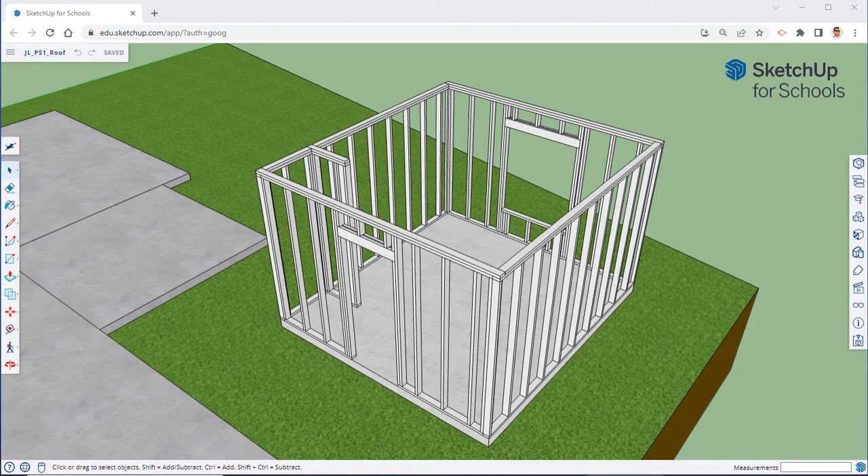Welcome back to our next episode of our Framing Plan Set 1 project. Here in this episode, we're going to finish up our closet. We already finished up one side of it. We just need to finish up the front.

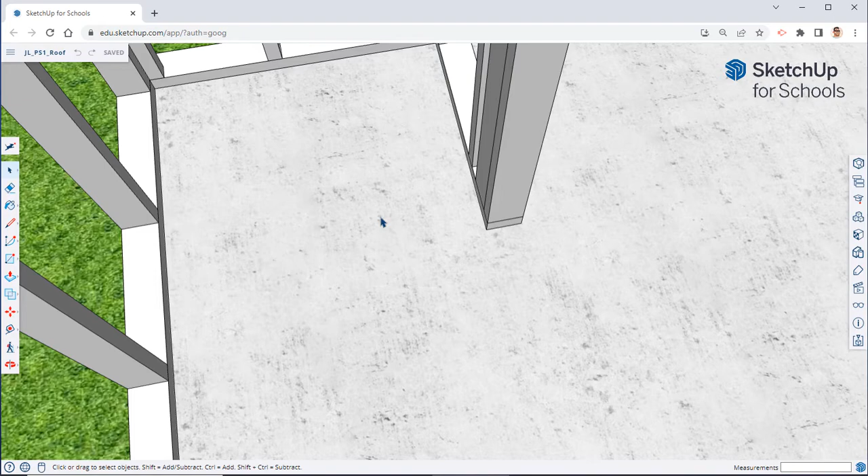In the blueprint book, it's really framed up weird up here in the front. I'm going to kind of ignore that part and just frame it up regularly. So let's go ahead and mark off where our base plate goes. So it's a 2x4, so it's 3.5 inches wide.

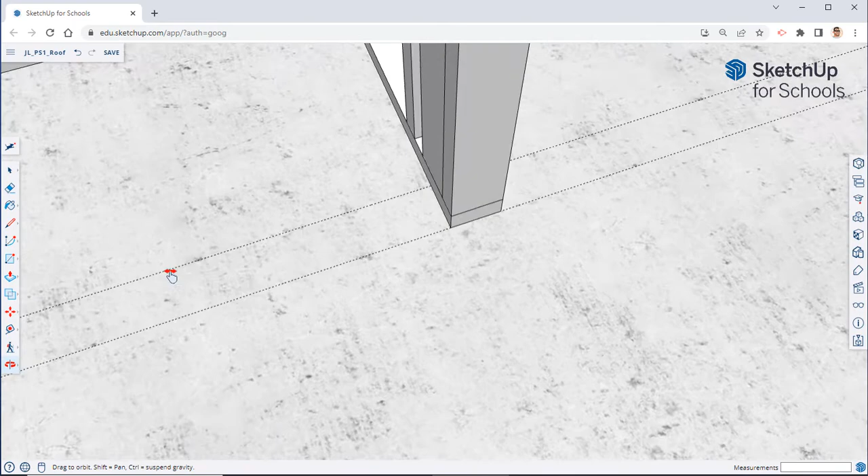And I'm simply going to make a rectangle right there. Select your push-pull tool and push-pull it, hover over one of those other places, or type in 1.5. Whichever way you want. Hit your spacebar to bring up your selection tool, and now you can quickly turn this into a component.

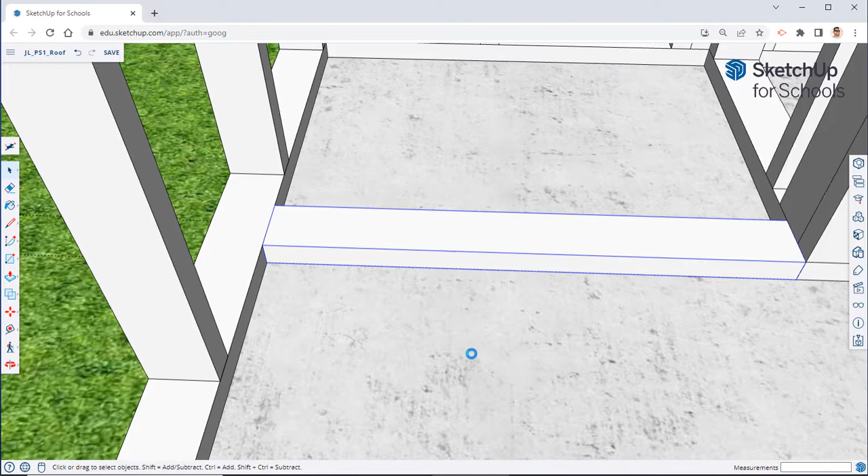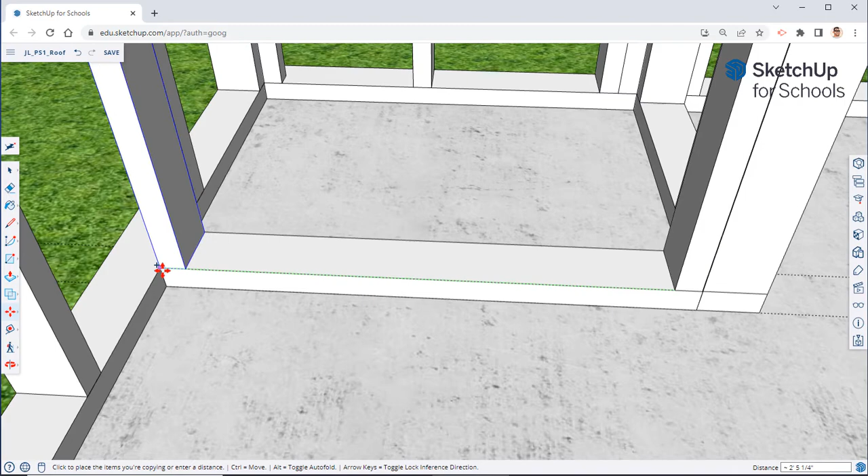Let's go ahead and use one of our regular studs. So I'm going to take this one, hit Control, bring it over here. I want to place it there in that corner. I'm going to take this corner and bring it over to there, and then select this corner and bring it there.

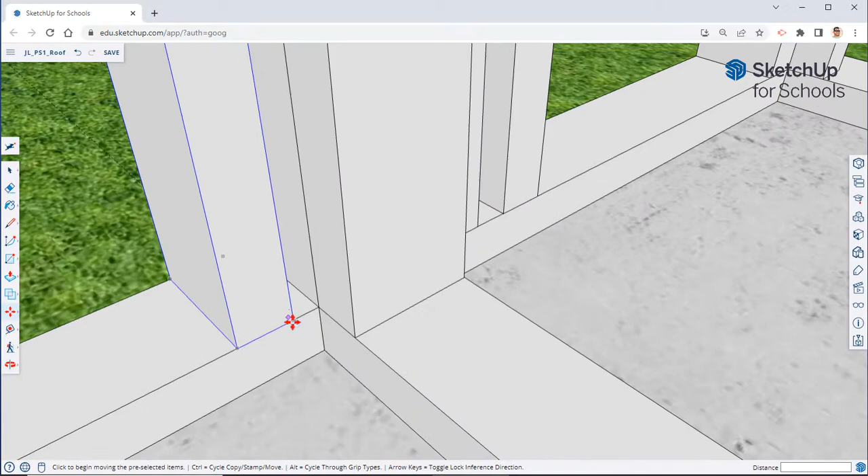Next, let's go ahead and take this one, hit spacebar, let's put it somewhere right there, and we'll put this one right there. Then let's come over here to the other side so we can actually move this into place.

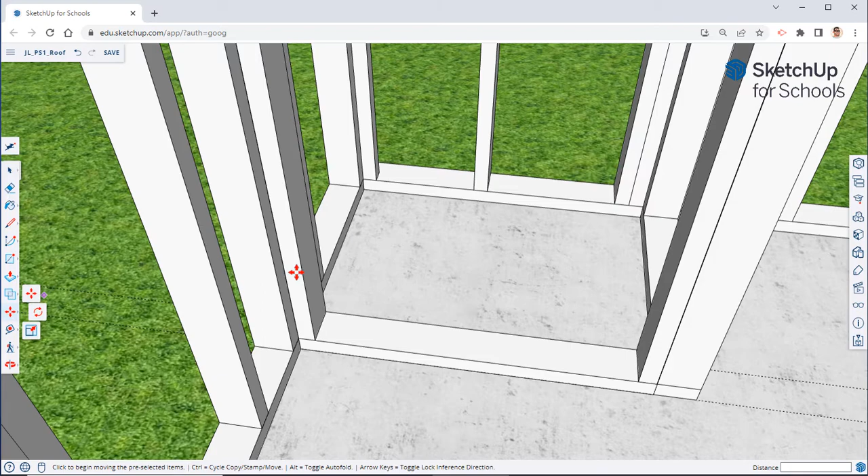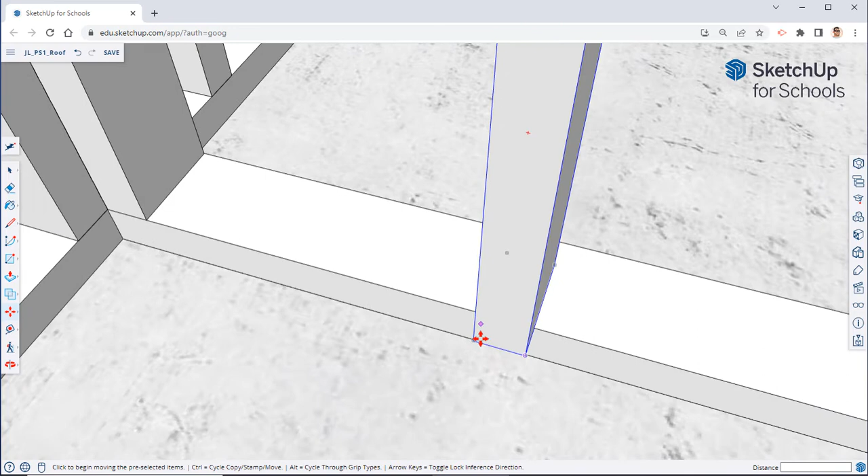Next, we're going to find one of our little jack studs. We're going to take that, hit Control, and bring it over here. Let's hover over the top with the Move tool, and we can rotate it around. And here we can put that right there, and that right there.

Next, we do not need this part, so I'm going to edit component, draw my rectangle, select the push-pull tool, and lower that, and then erase anything that might still be there.

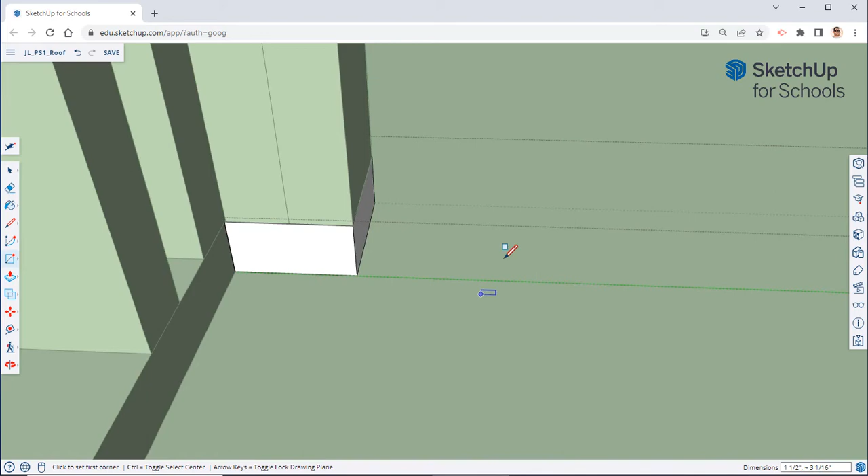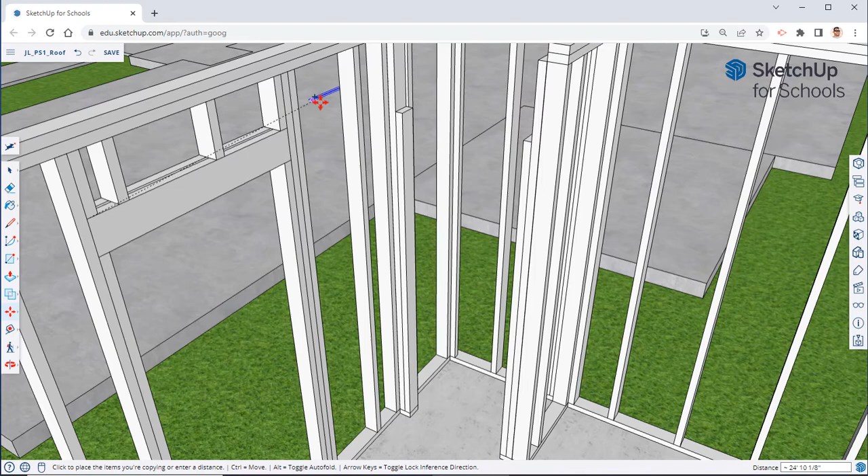So we got that. Now we need our header. So take our header, bring it over here, just place it somewhere. Hover over the top of it, rotate it around. This is a group, so we don't need to worry about making it a component or anything like that.

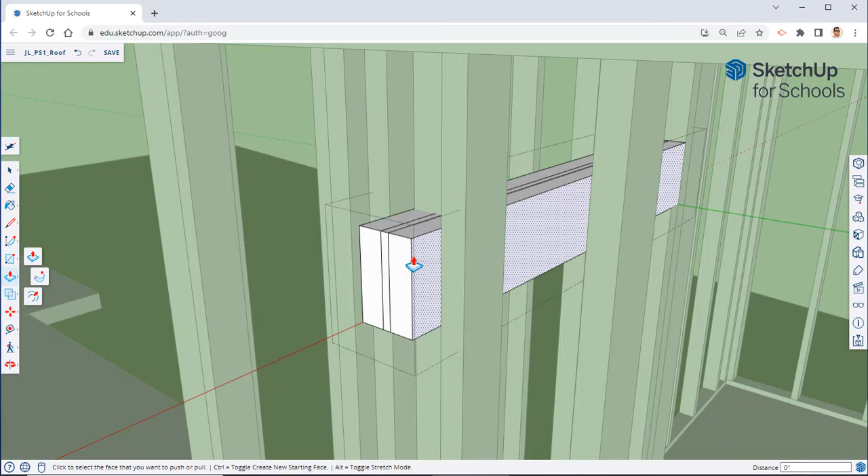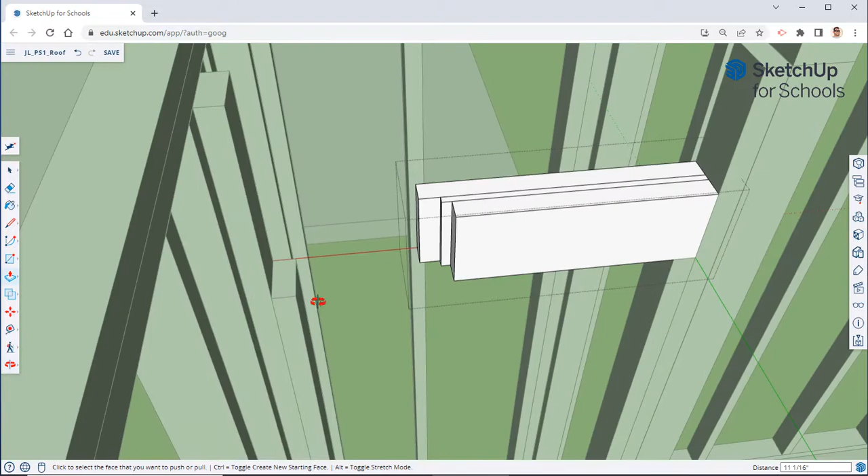And I'm simply going to take this and push-pull it towards the center. Like that. So that way I can redo it and move it to the stud.

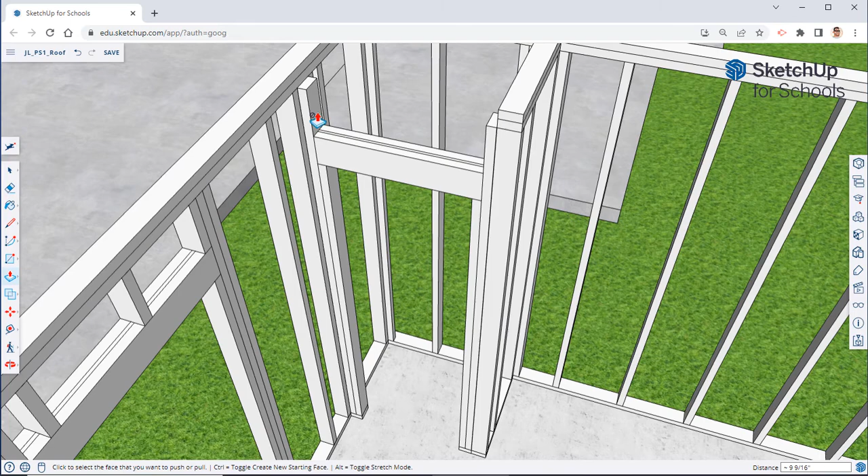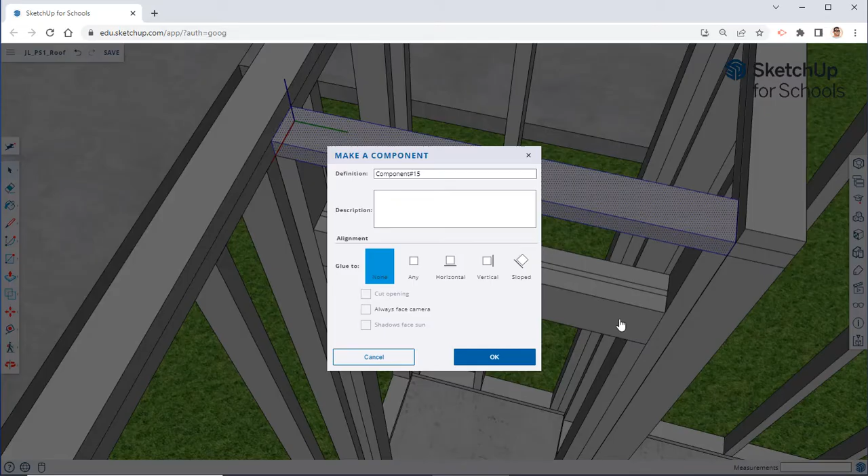We probably should have brought this one up here before we did that, but we can simply just come in here. This first one is going to be the entire length. Select your push-pull tool. That's going to go up our 1.5 inches. We can turn that into a component, or you can turn it into a group. It's probably going to be a lone thing.

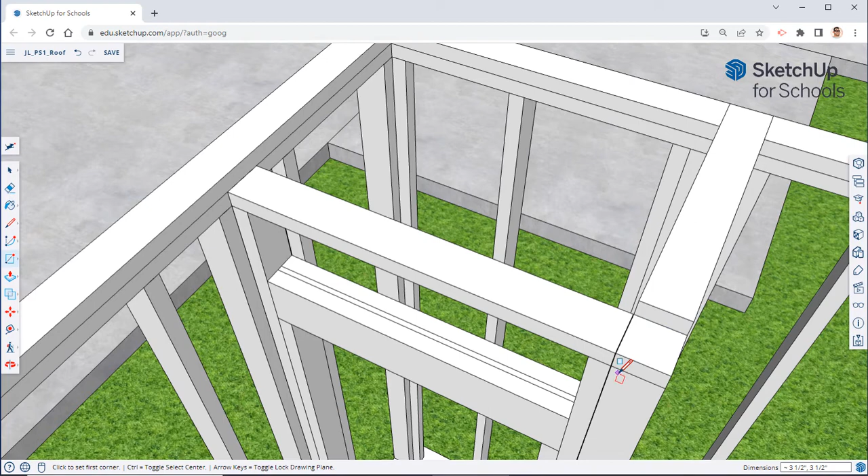So this one, we do need to edit component, push-pull, and this needs to go to there, because again, we need to alternate. So this one goes all the way to the end, this one is shorter. Let's go ahead and make a little rectangle there. Push-pull it up to 1.5 inches. And then on this side, we're going to pull this all the way to there.

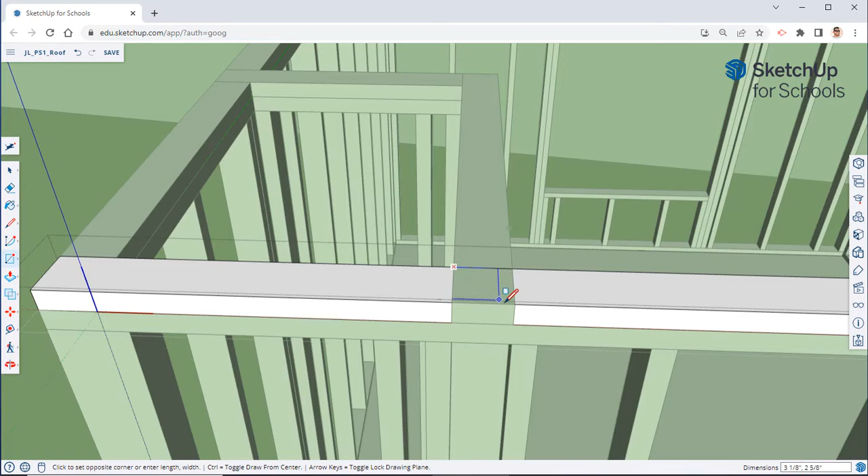Now I need to make this one unique. I'm going to edit the component, and then I'm going to draw in my rectangle up right there above that new one. Take your push-pull tool and lower this down our 1.5 inches in order to get rid of it.

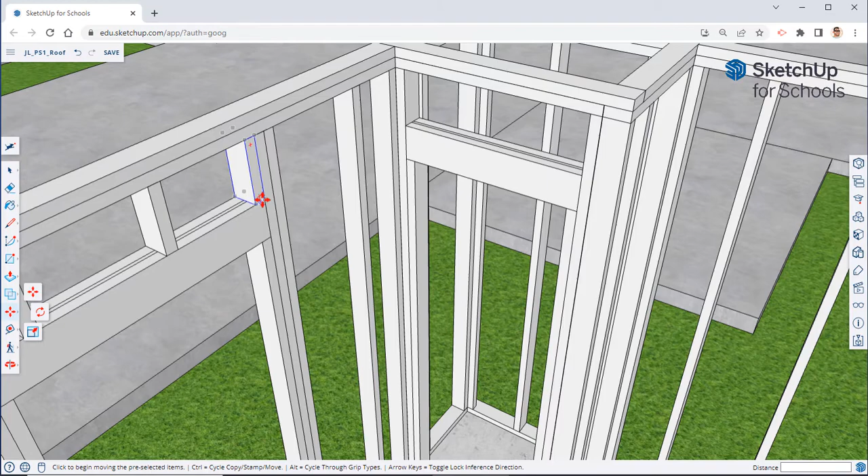Our cripple studs are just the same, so we can reuse these. Make sure you hit Control in order to copy. Bring that over. Again, we have one that goes there. We have one that goes there.

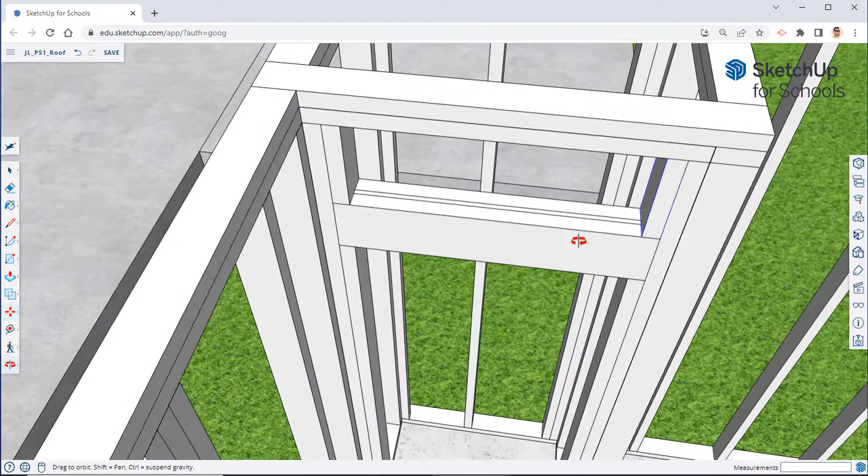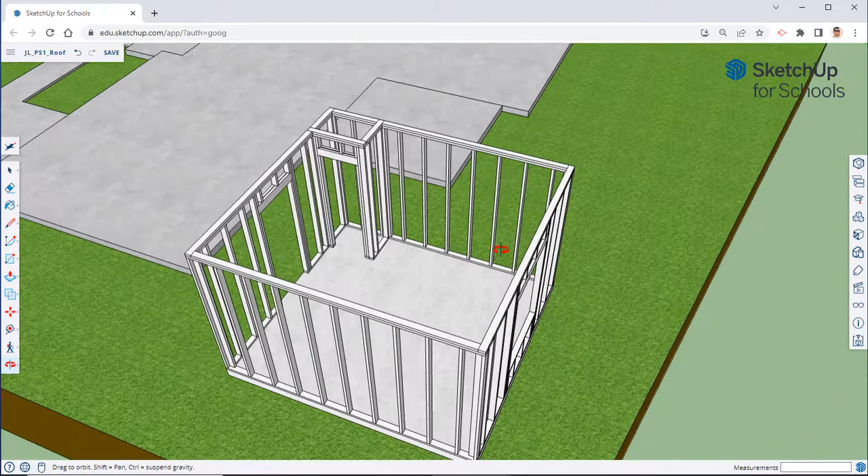And then let's just make a guide at 16 inches. So that's where our next one's going to be. And that space is less than 16, so we're good. So there is our closet door. Let's go ahead and we will stop there.

As our next episode, we're going to get into our roof and start working through that.